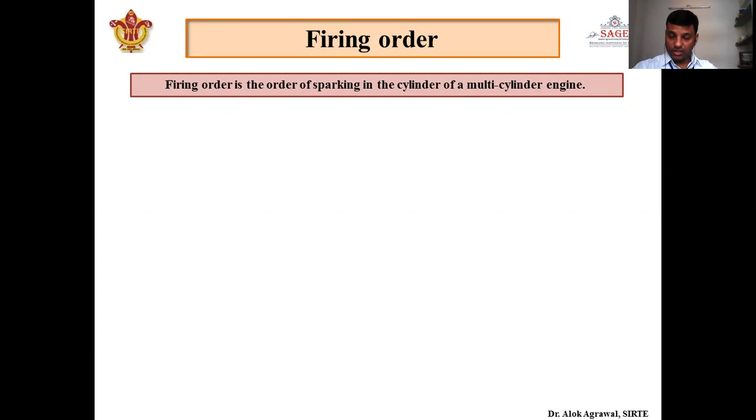So firing order is the order of sparking in the cylinders of a multi-cylinder engine. So first of all, we have to keep in mind that it is for multi-cylinder engines only, not for single cylinder engines. And firing order is the order in which we are sparking the cylinders of a multi-cylinder engine.

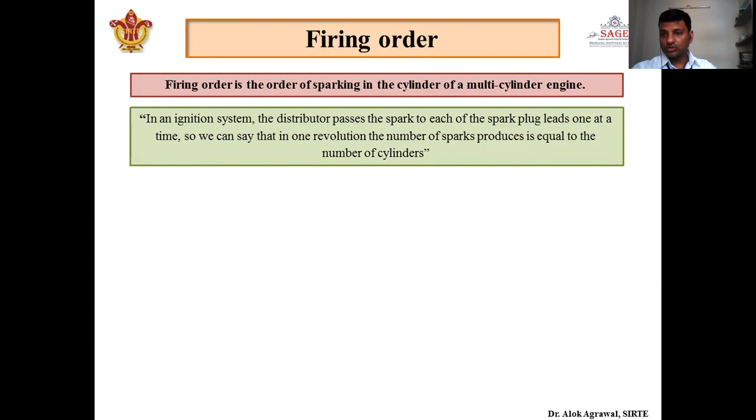Okay. Actually, in an ignition system, the distributor passes the spark to each spark plug. There is a distributor which supplies spark to the spark plugs one at a time. If there are four cylinders, only one cylinder can be sparked at a time.

Okay, so we can say that in one revolution, when the crank completes its one revolution, the number of sparks produced is equal to the number of cylinders. The distributor is connected to the crank, and when the distributor has completed one complete 360 degree revolution, its work is to spark each and every cylinder. So the number of sparks is equal to the number of cylinders.

Okay. So from this statement, the ignition system will be like this, where the distributor passes the spark to the spark plug, and the number of sparks depends upon the number of cylinders, because it has the duty to spark each and every cylinder in one complete revolution. Okay.

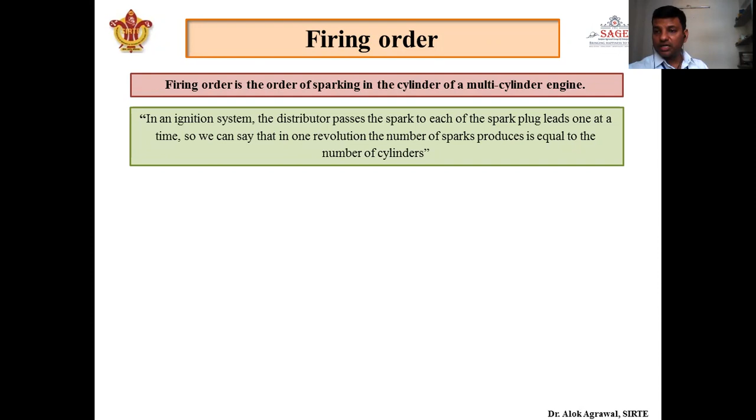So, if we consider a four-stroke four-cylinder engine, sparking occurs in a four-stroke engine when the crankshaft rotates twice. One sparking is required at the time of compression, when the compression stroke is about to end. One sparking is required in two revolutions of the crankshaft in case of a four-cylinder engine.

So if we are talking about a four-stroke four-cylinder engine, then it has to be sparked when the crank has completed two revolutions, that is 720 degrees of crankshaft revolution. Okay. So how many will be the number of sparks? There will be four sparks because the number of cylinders is four. So when we divide 720 by 4, we get 180 degrees. So sparking has to take place every 180 degrees of crankshaft revolution.

Now the order in which the cylinders are sparked, means first, second, third, fourth, or whatever the order, is called firing order. Now, the firing order of an engine depends upon the number of cylinders in the engine. The number of sparks is equal to the number of cylinders, but also the firing order depends upon the number of cylinders. There will be different firing orders for four-cylinder, three-cylinder, and 6, 8, or 12-cylinder engines.

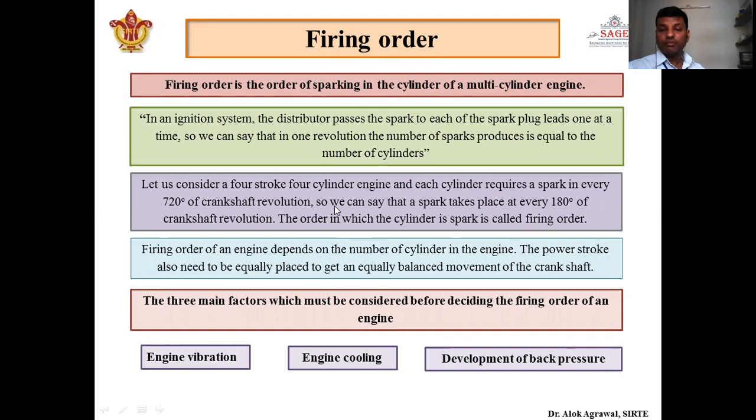Now, what are the various factors which decide the firing order? There are mainly three factors which decide the firing order of an engine, whether it is a three-cylinder or four-cylinder engine or 6, 8, 12. First is engine vibration, second one is engine cooling, and the third one is development of back pressure. So we will see each one of them one by one.

So first of all, let's start with engine vibration. I am considering here a four-stroke four-cylinder engine. So here 1, 2, 3, 4 are the four cylinders of the engine. Now I am considering that the first sparking took place at cylinder number 1. So when the sparking took place, what will happen? The fuel will burn and produce a large amount of energy, and that energy forces the piston in the downward direction.

So suppose this F is the force imparted by the burnt gas on the piston head. So when there is a force on the piston head, the piston starts moving downward, and this force will be taken by the two bearings or two supports of the crankshaft. This red one is the crankshaft. Now see how the force will be distributed. It is just a simply supported beam problem.

If there is a force F which is at a distance of a from bearing A and at a distance of b from bearing B, then by applying the formula of a simply supported beam, we get the reactive force at bearing A will be F into b upon (a plus b), and the reactive force at bearing B will be F into a upon (a plus b).

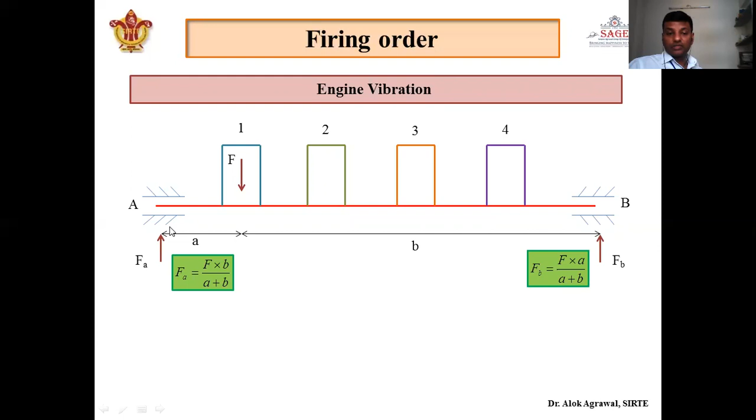So which force is large? Obviously this one, because b is greater than a. So in this bearing there will be a large force. Fa will be greater than Fb. So clearly the force on bearing A is more than the force on bearing B. So if we fire cylinder number 2 after cylinder number 1, then what will happen?

Again the A will change, the B will change, but again the B will be greater than A. The distance between 2 and A will be lesser as compared to the distance between 2 and B. So if we fire the second engine after engine 1, what will happen? The load in bearing A will increase again, which causes engine vibration, because twice in a cycle the load is more at point A and B has not yet had much load, so there will be engine

vibration. So to reduce this vibration, we will not fire engine 2 after engine 1; we will fire either 3 or 4. That has to be optimized depending upon the other parameters, that is engine cooling and back pressure generation. So it is clear from this discussion that we cannot fire cylinder 2 after cylinder 1 because it causes engine vibration, as the load in bearing A will be more at a particular time and there will not be any load in bearing B as compared to bearing A.

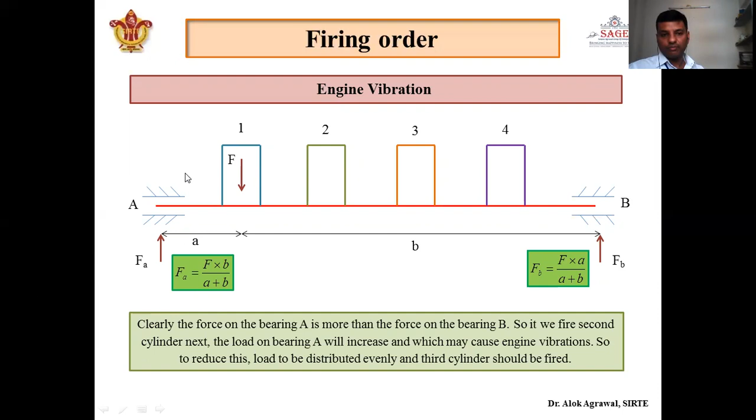The second factor is engine cooling. When the first cylinder is fired, its temperature will increase. Obviously, when energy is produced, its temperature increases. If we fire the second cylinder after that, the temperature of the second cylinder will increase. So the part of the engine between cylinder 1 and cylinder 2 will get overheated. At the same time, cylinder 3 and cylinder 4 have not encountered any firing, so they will be relatively cool. So one part of the engine gets overheated, and the other part does not have any heat.

The task of the cooling system will be difficult, because at the same time it has to give more cooling to one part of the engine than the other, because one part is getting overheated and another is not. It will be a very difficult task for the cooling system to change its position with respect to time. After sparking, the cooling will be more effective near 1 and 2, and later in 3 and 4. So if we fire the third cylinder after the first cylinder, the problem of overheating can be reduced. So because of engine cooling also, we cannot fire the second cylinder directly after the first.

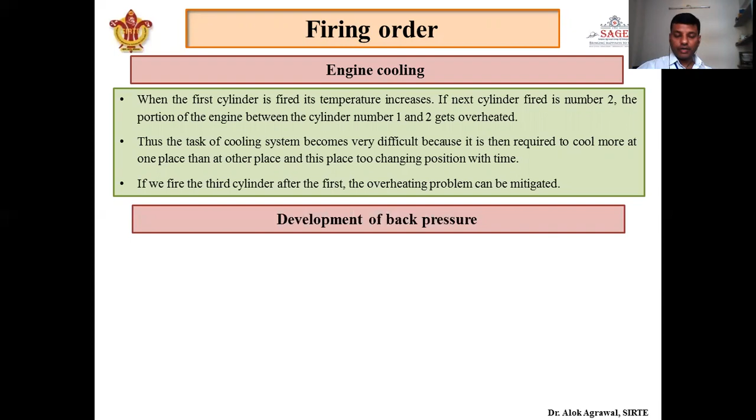Now the development of back pressure. What will happen after firing the first cylinder? The exhaust gases created will come into the exhaust pipe, and if we fire the next cylinder 2, we will find that before the exhaust gases from the first cylinder go out the exhaust pipe, the gases exhausted from the second cylinder start to overtake them. Because of that, there will be less space in the exhaust pipe, and the gases from cylinder 1 and cylinder 2 will be more. So to solve this problem, we have to increase the size of the exhaust pipe. And if we increase the size of the exhaust pipe, the overall dimension of the engine will increase.

And if we do not increase the size of the exhaust pipe, back pressure will be created, and it will increase very drastically. So to solve this problem, either we increase the size of the exhaust pipe, or instead of firing cylinder 2, we fire cylinder 4, so that by the time the exhaust gas of cylinder 1 comes out of the exhaust pipe, 4 will come, and from the other side the second cylinder's exhaust gas will come. By the time the exhaust gas of cylinder 4 comes into the exhaust pipe, the gas from cylinder 1 will have sufficient time to travel the distance between 1 and 4, and because of this the development of high back pressure can be avoided.

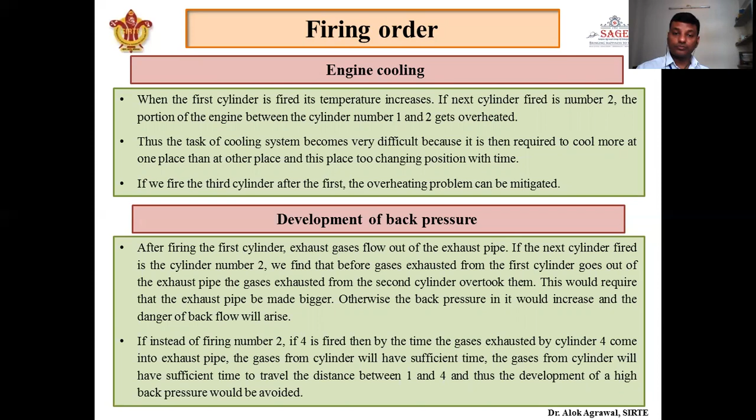So from all these three parameters, we have seen that after firing cylinder 1, it should definitely not be cylinder 2. It can be either 3 or 4, depending upon optimization, doing a number of runs and considering these three parameters to get their minimum values: engine vibration minimum, engine cooling requirement minimum, and development of back pressure minimum. It has come out that for a four-cylinder engine, the best firing order is 1342 or 1432; either can be used. For a six-cylinder engine, it can be 153624, and for an eight-cylinder engine, 15426378. All this data is from experimental analysis on the basis of those three factors.

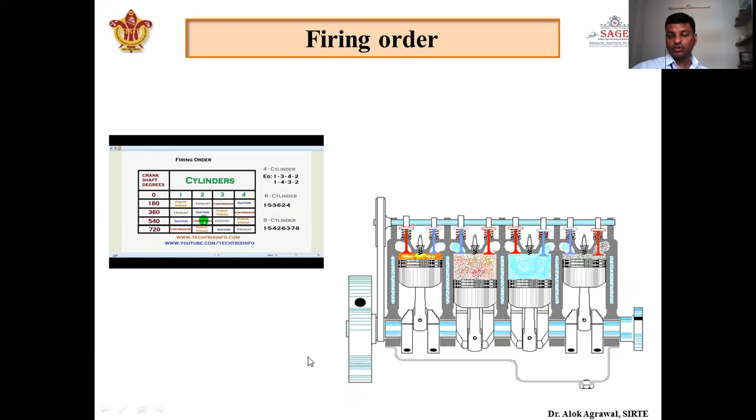So this firing order is very important because it governs comfort and the life of the engine. This is the animation I have shown of firing order. Here it can be seen that after cylinder 1, 3 will be fired, then 4, then 2. You can see cylinder 1, now 3, 4, 2. 1, 3, 4, 2. The firing will occur like this in an actual engine as well. So this is all about the firing order.